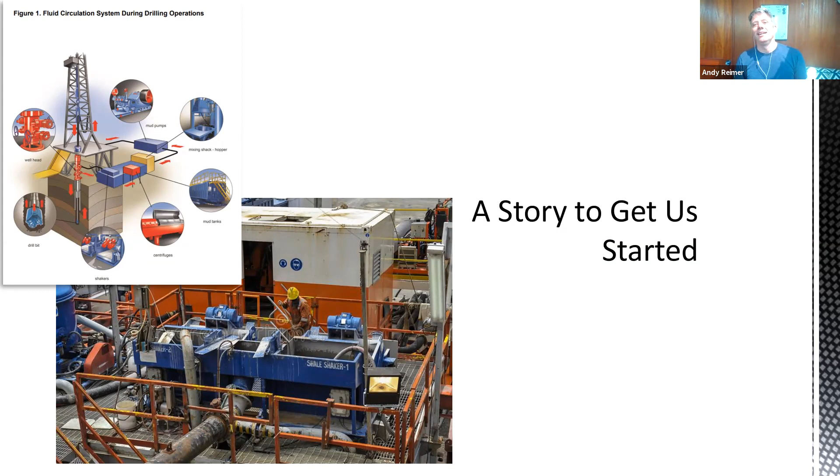It didn't matter what solution you came up with. Robert was capable of poking holes in it and showing why your solution didn't actually solve the problem. And that was a wonderful, wonderful gift, because it taught me that controls are complicated. All right, another story to set the scene.

2019, when we were last allowed out of our homes, I ended up doing this presentation called Engineering Controls, They're Only Human After All. I did it at Petroleum Safety Conference in Banff, and then later on in the fall in Winnipeg at the CSSE Professional Development Conference. And I'm referencing both because you'll know why in a moment in the story.

So the whole premise of this presentation was about engineering controls, and the hierarchy of controls we'll talk about later in the presentation. Engineering controls are supposed to sort of get rid of the human element. In other words, administrative controls, PPE, these other kinds of controls have all these human factors. But an engineering control kind of works automatically.

It's kind of magical. You build it, you set it, you forget it, and it will engage, it will do what it needs to do without human intervention, which of course isn't true. That's part of why they're complicated. We'll talk about that later. But anyway, back to my point on this slide,

I had a little activity on the front end of my presentation. And in both cases, I'm working with safety professionals, so my assumption is that everybody understands engineering controls. So I ran an exercise and said, okay, give me an example of an engineering control. I got everyone broken up. Within your group, think about an engineering control and then talk about all the human factors that could potentially come to bear in that engineering control.

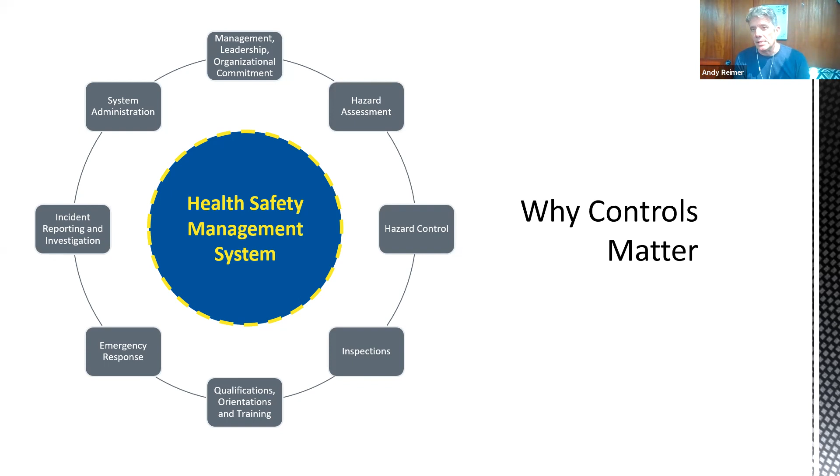But this is an important principle that I came to understand and really embrace during my time at Energy Safety Canada, as we worked through a variety of projects, and it turned out to be true again and again and again.

And that is, we need to rethink our picture. Rather than a management system that has all these equal parts, when you're dealing with safety, at the core of all safety is hazard identification, assessment, and hazard control. All your other elements actually come out of that, support that, drive that, but that's actually the core piece.

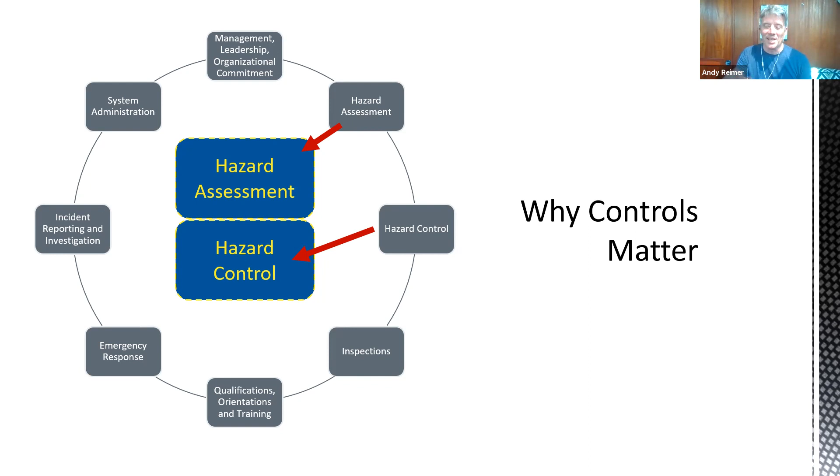With an E, but it should also be the core piece in the other sense. Anyway, I digress. Within that nexus of hazard identification, assessment, and control, the most important piece is control. Why do controls matter? Because there's only one element in your entire health and safety management system that actually prevents your unwanted event, that actually prevents the incident, and that is hazard control. So this has to be at the center of this whole system.

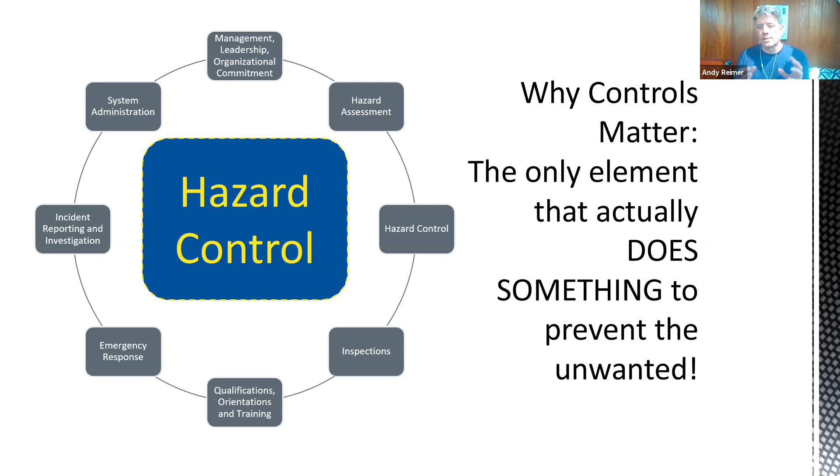All kinds of elements, but at the end of the day, the difference between somebody getting killed, somebody getting injured, a pipeline opening up, a well losing control, the difference is, did the controls work or did they not? This is the stuff that actually prevents it, okay? Just assume we're all agreed on that. So, great. Very simple.

Controls are what matters, but they're complicated. And why are they complicated? Let me count the ways. This is going to be in the category of the "Are we done yet" syndrome. This is for those who've got kids, and who have staff, with attention spans accordingly.

So almost inevitably, when you get to that core piece of hazard identification, assessment, and control, we're going to do it a variety of different ways depending on what kind of safety you're into, the nature of the work of your company, and so on. But you're always going to have this flow: you start with identification, then some kind of assessment, and then finally you do control.

And part of what I've noticed is that we get really fixated with hazard identification. We put a lot of energy into that. I think part of that is because of the incident side. Whenever we have an incident, how often do you put your finger on: they didn't notice that hazard, they didn't spot the hazard. So we keep coming back with, our hazard identification isn't good enough. So we keep pouring this energy into hazard identification.

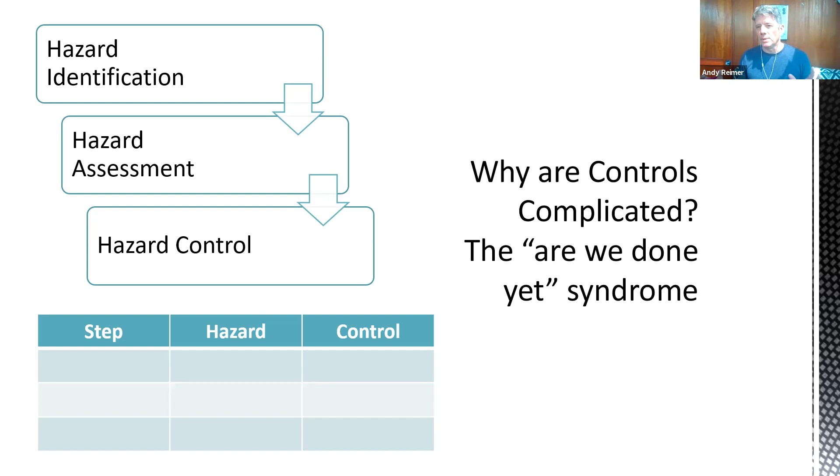When you break the job into steps, I guarantee almost everybody will break the job into steps, argue a bit about where the steps go, and then add the hazards. And what gets done last? Always the controls. By then you are keen to get started on work, to wrap up, or get on to the next one. All the discussion and brainstorming around the hazards has petered out by the time you get to controls.

And then we make it worse. Our formalized one is starting to look increasingly like this: you've got the steps, you've got the hazards, we'll do a risk rating before we apply the controls, then we'll think of the controls, then we'll do a risk rating after the controls. Again, we're introducing more activities. In many ways, this is right. There's nothing wrong with this, but in the end, how much energy is left for really thinking through the controls?

Often, so this is in the bucket of 'Are we done yet?' syndrome. We work on controls when we're all asking the question, 'Are we done yet?'

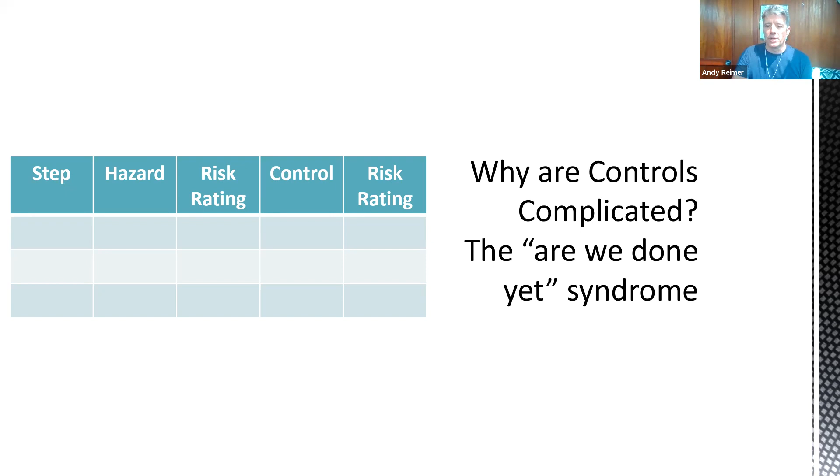All right, the next issue, the hierarchy of controls. Given my last experience with this, allow me for a moment to explain this briefly. Every regulator, every health and safety textbook will tell you that once you've identified your hazards, assessed your hazards, ranked your hazards, whatever language you use, you then start to think about the controls you apply against your hazard.

You thou shalt use the hierarchy of controls as a way of determining your most effective controls, and so you go from top to bottom. Your most effective control, of course, is eliminate the hazard. Best control ever, for sure.

Substitution usually applies in a number of places, typically with a chemical hazard. That's your classic example. You have a really toxic chemical in some kind of process. If we substituted that for something less toxic, we haven't totally eliminated the hazard, but by substitution we've made it not as severe. We've eliminated at least the delta between the two.

Engineering control, the one that nobody seems to get. That's totally unfair. But an engineering control is fundamentally about controlling at source. You're basically ensuring that the hazard exposure never hits the human interface. At its simplest form, a guard over a moving piece of equipment is the simplest form of engineering control.

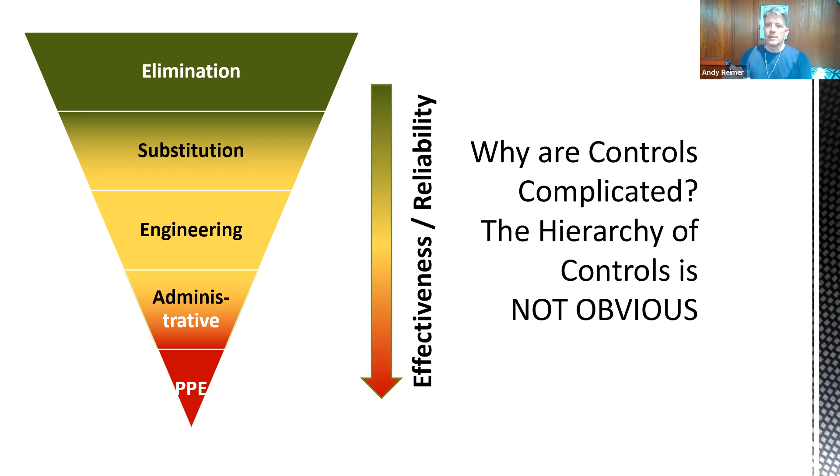So the hierarchy of controls, as per my earlier story, turns out to be deceptively simple. It's actually not as obvious when you start working with it in a practical way. So why are controls complicated? I think the hierarchy of controls hides a secret, one that some of you may know but not everybody fully appreciates: as you move from the bottom to the top, so if it's effective top down, cost, complexity, and unforeseen consequences move upward. And that has a lot of interesting and problematic implications.

We're going to talk about some of those. I think some of those you've probably already appreciated. Some of those are from my earlier story. But this is part of the challenge. The regulator can tell you to go down, but your cost and complexity go the other way.

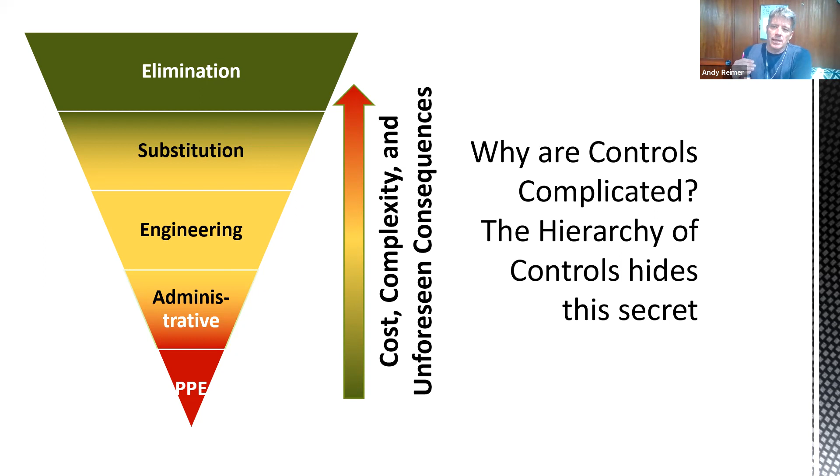All right, let's go to the next slide and look at some of these features. Engineering controls—I have a whole presentation on this, so I don't want to spend a lot of time, but just to remind you: with an engineering control, we believe we're going to remove the human element. It's a set it and forget it, right? Think about a classic example of a mitigative engineering control: an automated sprinkler. The moment there's sufficient heat or another detection trigger, it automatically opens and doses water. It's fantastic—there's no human element.

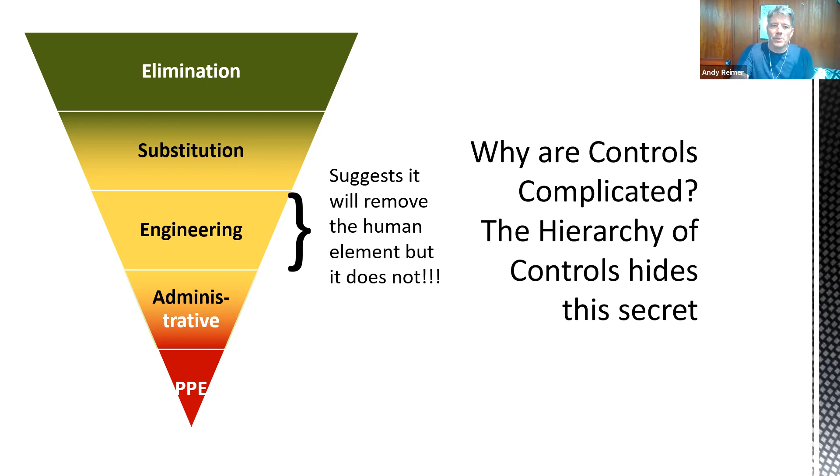Except, of course, there is, right? Why do sprinkler systems fail? Oh, we forgot to do maintenance. Or during installation, everything got piped in, but the last connection to the water source never actually got connected, right? There are all these human factors in the design, building, and maintenance of engineering controls where things go horribly wrong. That's typically how engineering solutions fail.

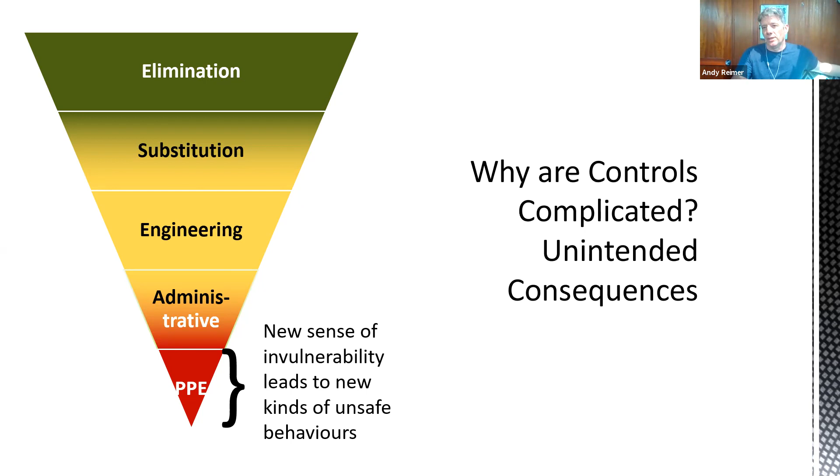PPE—how can PPE go wrong? Unintended consequences. This is a classic example. I won't give you a work example, I'll give you a hockey example. One of the complaints back in the dark ages, when they played hockey without helmets and visors, was that everybody tended to keep their stick below their shoulder. The moment we put on helmets and visors, sticks got up. Why? Because there's a sense of invulnerability. The moment you give people more PPE, they will start to engage in unsafe behaviors because they have a sense of invulnerability that comes from the PPE. I've heard stories of people issuing brand new and improved gloves and having hand injuries go up, right? Because they felt invulnerable. The gloves didn't actually protect them that much more, but they felt that way—completely unintended consequences. I guarantee the history of controls is littered with unintended consequences like that.

What's another example? Where do these go wrong? Unintended consequences—okay, both administrative and PPE controls. Often, remember that cost, complexity, unintended consequences. We kind of deal with that in PPE and administrative controls by having a blanket approach.

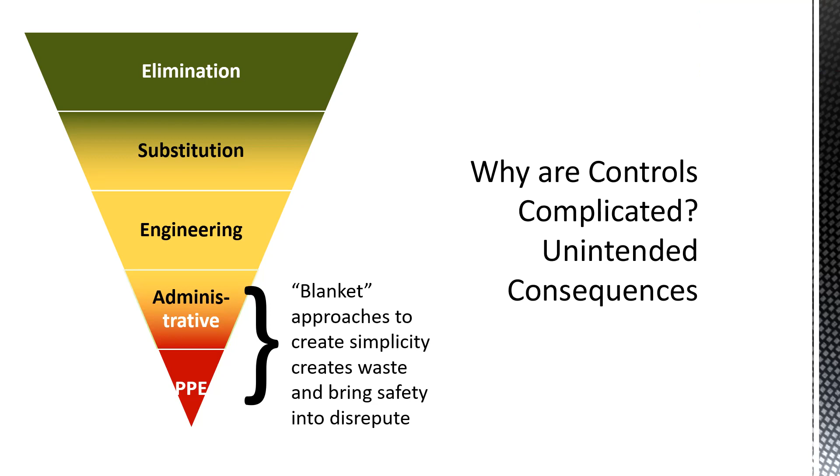This kind of comes out of safety's inherent distrust of the workforce, which permeates certain safety department cultures. We worry about company safety culture, but I think there's a whole industry we could create around safety department culture, because one of the things that occasionally marks it is an inherent suspicion that if you don't really hammer the rules home and go over the top, nobody will listen to you. There's a certain insecurity there. So one of the things we have a habit of doing inside safety departments is create these blanket approaches, because it's so much simpler—we create a hard and fast rule.

So I'm going to give you a classic story. There's a company, which I'll leave nameless, that is very large, and they had a policy on their work sites: thou shalt always wear these really fantastic high-tech heavy-duty leather gloves and hard hats. That was the hard and fast rule. This particular company decided that, as an energy-saving move, their retail outlets would all be converted to LED lighting, so they needed to bring in electrical contractors.

This is one in the category of an overheard conversation that I then went over and had an extended chat about with the person. One of the electrical contractors on the site starts telling his buddy the story of how it went. They're electricians in a retail building, and they've got these heavy gloves and hard hats. On day one and day two of the job, they have to crawl into crawl spaces to get a hold of the wiring. The first thing they realize is you can't actually get in there with a big hard hat, so they take it off, set it to one side, and lean in to do their work. The safety inspector comes by: 'You're not wearing your hard hat, you're home for the day.'

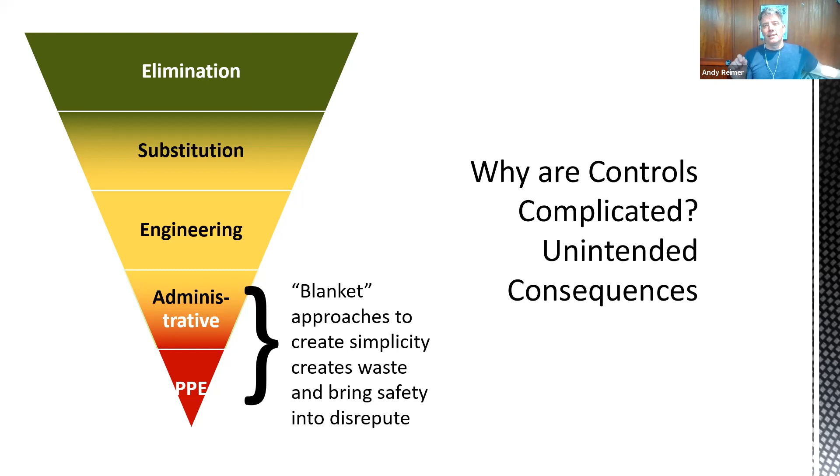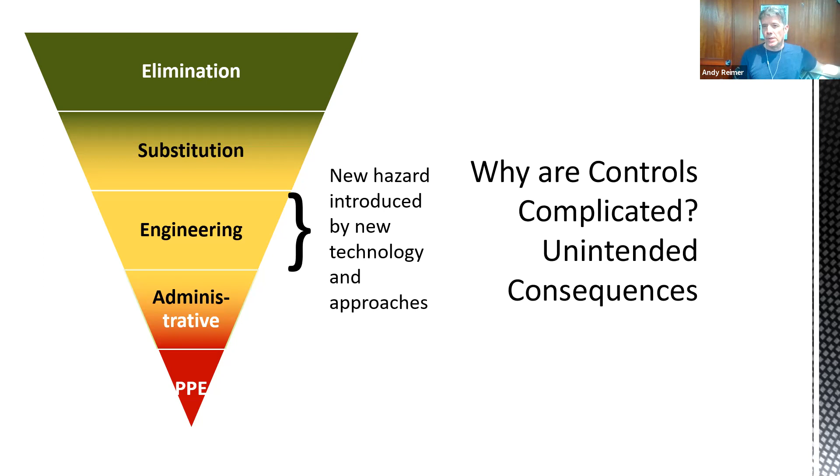All right, enough about that one. Engineering controls. And again, this speaks to the problem earlier, human factor—but not just human factors, technological factors here. That is, we'll come up with a solution for one problem, and we're so fixated on that problem that we fail to appreciate that the new technology, the new approach, has introduced new hazards that we didn't stop to consider. This is the illustration I threw in for my last presentation. To me it's so powerful and effective, so I'm giving it to you because you can steal this one and use it the next time you're talking about engineering controls or why they're tricky.

And that's the Boeing 737. So the whole premise—and you should be familiar with the story from a couple of years back, in 2018, 2019 the story really broke—Boeing had this exceptionally successful 737-800, but they wanted to get into the fuel-efficient commuter plane segment of business. So they took their 737 platform and swapped in this much more fuel-efficient engine for the MAX 8 that you see below. But the net result, as you can imagine, is that airplanes are carefully balanced pieces of equipment. And the new engine sat slightly differently with a slightly different weight, and it threw off the balance of the whole plane. It adjusted the balance of the whole plane.

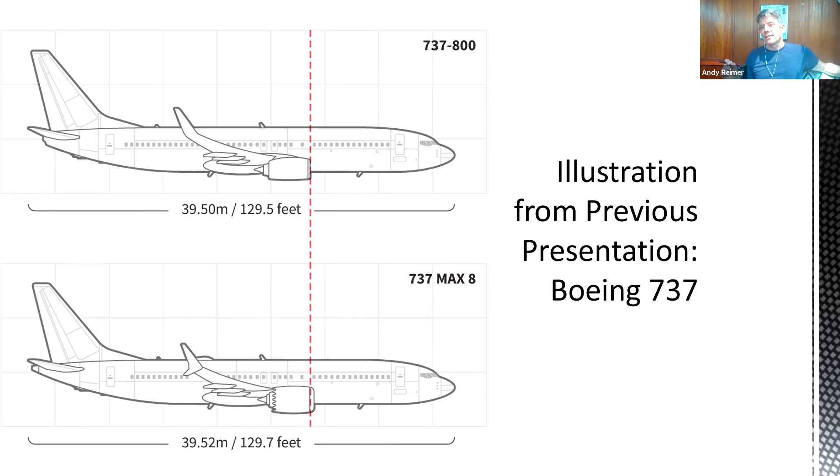So now, a couple of things happen when you throw off the adjustment of a plane's balance. One is it's going to fly differently. So now here's your problem: if it flies differently, is it a different plane? And do you have to retrain all your existing 737 pilots on this new 737? They came up with a very—understand the costs, there's this fine cost margin, the profit margin, in the whole airline manufacturing business—and one of the ways they could sell this, just like the competitors, is they could say, well, you can go straight from the 737-800 to the MAX 8 and not retrain, because we're going to create the Maneuvering Characteristics Augmentation System. What it will do is use a piece of software that will cause this new plane to look and feel and fly exactly like the old plane, and you don't have to retrain.

And this is really clever. One of the pieces of the MCAS system is that it had an angle of attack sensor, which is this feedback loop. So it can tell, is the nose pointed up or down?

Of course, if you follow the story, what actually happened is that angle of attack sensor on the outside of the plane failed, and the pilots had to start fighting. So the pilot adjusts, and the software system says, 'Oh no, you're still pointed too far down,' or the opposite way, 'You're pointed too up, and if you get pointed too far up, you're going to stall. So excuse us, Mr. Pilot, we're just going to take over for a second and bring the nose down.'

So the pilot pulls back up, and the sensor goes, 'No, you're still too steep. We're going to put you down because we don't want you to stall.' This is a fantastic safety feature that prevents people from stalling their airplane. Except, of course, if it's not working and it's sending the wrong signals to the software system.

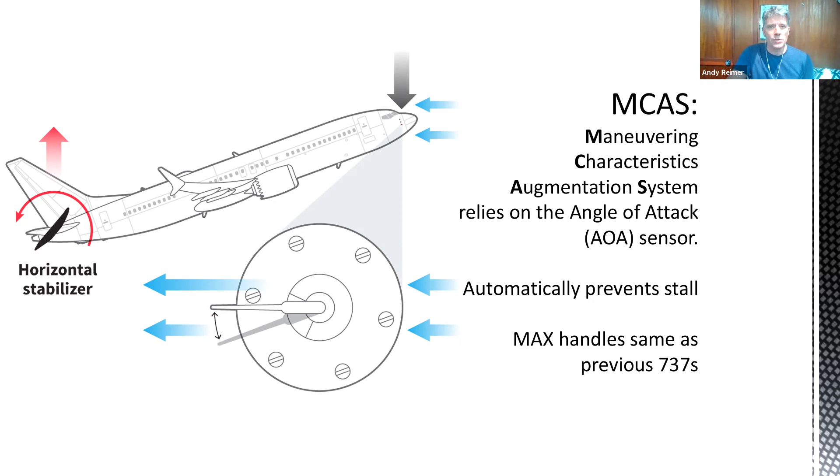In which case, you're headed down, it thinks it's stalling, and it keeps pushing the nose down, and the pilot can't bring it up. Now, had they thought about this eventuality? Yeah, they had, of course they had. They had two little switches there that you could use to turn off the MCAS and get back to fully manual control. And as you can imagine, in that cockpit, with this being a small piece of a booklet training, in that moment with this new and unfamiliar plane, the pilots that crashed their MAX 8s did not put two and two together. They did not flip those switches.

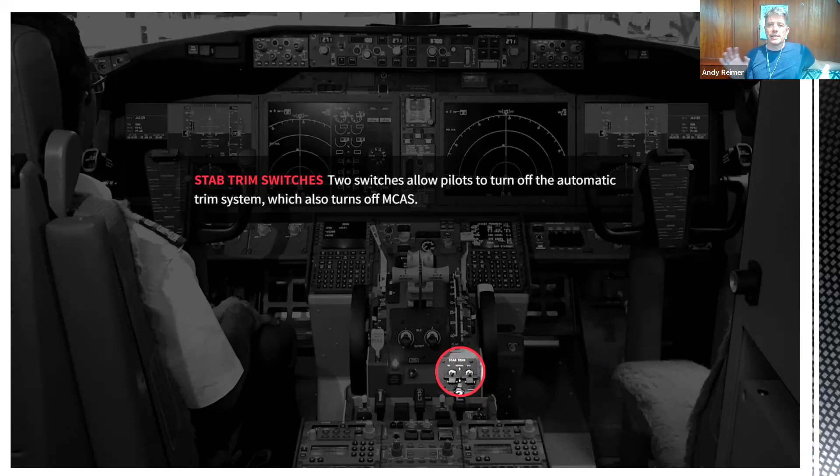So, classic example. This is a safety feature. The MCAS was an engineered control. Automatically prevents stalling, ensures an inexperienced pilot stays safe, the best of intents. Great, but they didn't have Charles Perrow in the room, and they should have, because they added complexity, and the combination of complexity and tight coupling is at the heart of what's called normal accident theory, and it's bad news.

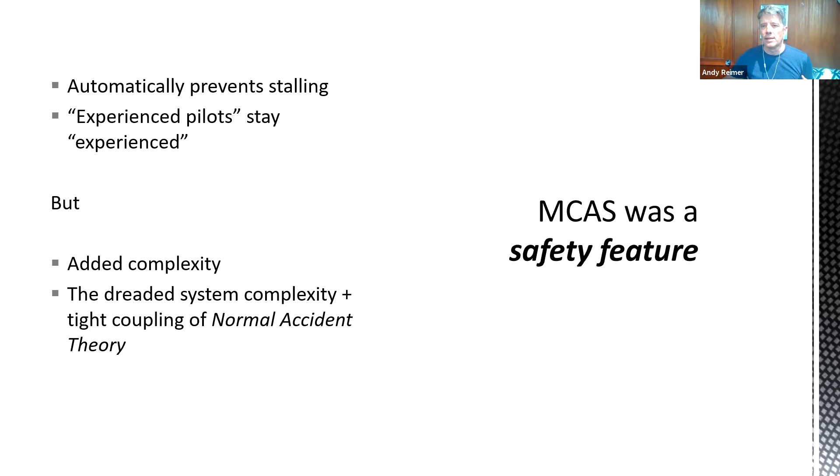I'm not going to spend a lot of time on it, but just to say that wherever you're ending up with this combination of a complex system, where one system bleeds into the next and you can't see which system is doing what at any given point, it'll run tickety-boo. But the moment something goes wrong, your ability to unravel what has gone wrong will not move fast enough for the event unfolding. The event will unfold faster than you can figure it out.

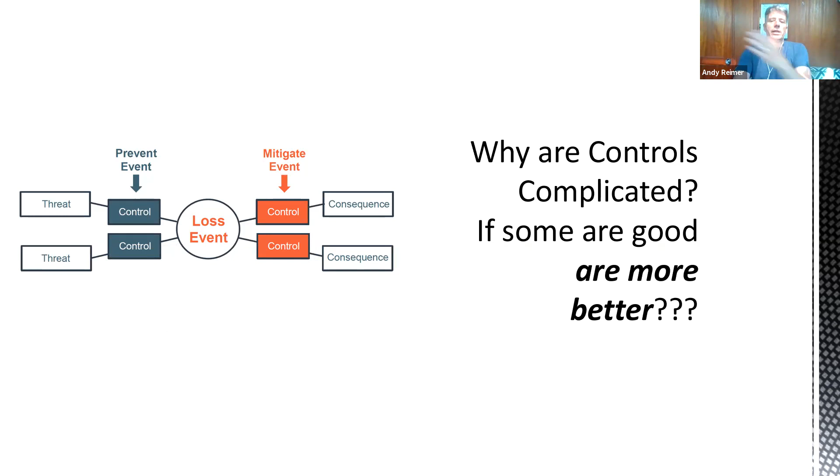Why are controls complicated. Here's another quick feature I'll get to: if some are good, are more better? Here's your classic, you guys know the bow tie. I want to explain, right? Threats, preventive controls that prevent the event, the loss event, the unwanted event, and the far side of it, which is the mitigation controls, so you don't get to the consequences. Okay, you understand bow ties, just assume it, go learn them if you don't. They're wonderful things. Here's the challenge.

One of the challenges is that the more controls you have, the more complex the system is, and the more chances these are tightly coupled, the more chances you have unintended consequences. So more controls means more unintended consequences. More is not better, but we think it is.

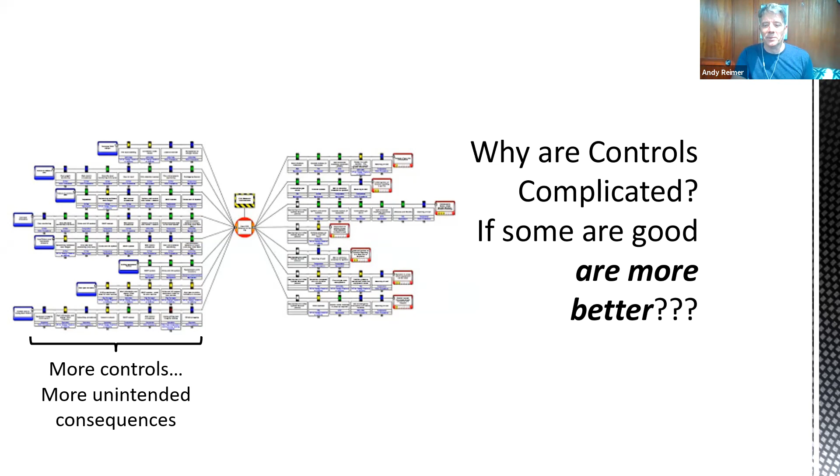And everyone will feel better when you've got 5 controls instead of 1 or 2. All right, so my latest challenge is around why controls are complicated. I'll be brief on this one. So we had a couple incidents.

We had a couple incidents where a helicopter takes off with a load. If you know anything about long line operations with a helicopter, every so often a load won't fly. This is the nature of it, and it will start to swing, and do things that create a hazard for the helicopter. And the pilot has a button they can push, and when they push the button, they drop the load, preventing the helicopter from crashing.

So we had 2 loads jettisoned. And this was an incident that just broke the alarm bell. Oh my God, we have a crisis around long lining here. So some of us were sitting around and form a committee, fly people around, bring in all the contractors, right? The usual response to 'we have a crisis.'

And it was interesting because some of us were sitting around going, I don't know, is that really even an incident? I mean, they dropped the load away from the right of way in a non-populated area. Dropping a load is technically a mitigative control to prevent the consequence of the helicopter crashing.

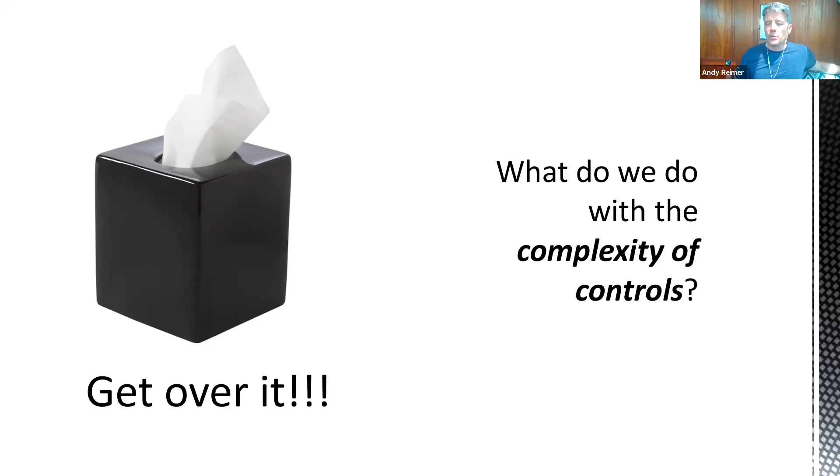They're the elephant in the room, but we have to get over it, because remember, what's at the core? What's at the core of our safety systems is hazard controls. If we don't solve this problem, we've solved the rest of it—it's just lipstick on a pig.

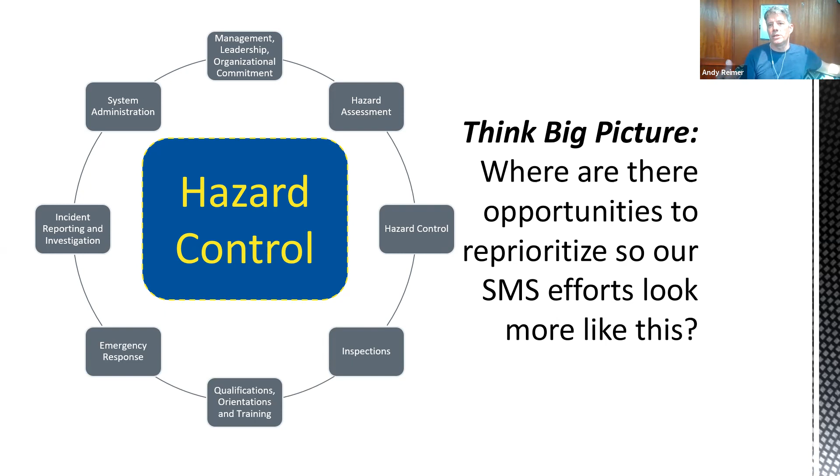It's not helping. So I think my challenge to you today is to think big picture. Where are there opportunities to reprioritize so our safety management system efforts look more like this? I'm just planting the seed. I'm going to throw some suggestions at the end, but I want you to think seriously about what if we start seeing hazard control as the most important thing we do, at the center of what we do, and everything else just supports that.

A couple of suggestions on some of the specifics. Are we done yet? How do we overcome that? There are some simple ways we can do that. One simple suggestion: if you're ever going through whatever simple or complex version of hazard identification, assessment, and control—obviously if this is the moment before you're doing the job, I've got suggestions there—but let's say you're sitting down and you're going to take some time with one of these, or do another one of these.

Break it up, right? Do your hazard identification, hazard assessment, take a long break, do it the next day. Whatever it takes, when you sit down to do hazard control, make it feel like you're starting with something. Come in with fresh energy, fresh eyes, not bedraggled, tired of the process. This stuff deserves fresh energy, fresh eyes. Figure out how to do that with your processes. I think that'll make all the difference in the world.

And then this is my other suggestion: cost, complexity, and unforeseen consequences coming out of your controls. So you've got two options here. Either hire or nurture a whip-smart contrarian to play the devil's advocate for your control discussions. If you need to name somebody to do this job, do it. I mean, devil's advocate is a classic safety culture move. Bake it into your control discussions.

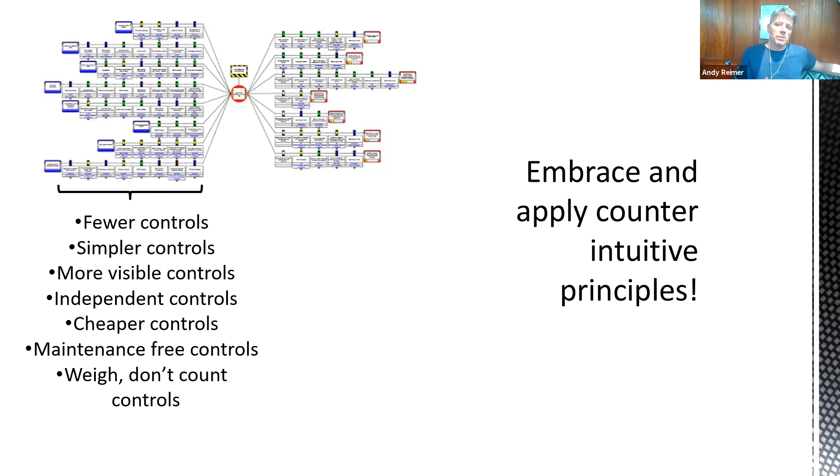When you create a diagram like this, don't count the controls, weigh them. How effective are they? How fail-safe are they? One that's really effective, fail-safe, everybody knows about, everybody can see, everybody monitors, is far more valuable than 10 that only one person knows about, or that are high maintenance, or really expensive and won't get implemented till two years from now. Go back to these principles. These are not the principles you will normally think about doing controls. You need to.

The other thing: stop managing incidents, start managing controls. You know that example I gave you with the helicopter and the crane? Forget about whether it is an incident or not an incident. In that instance, you have a control that failed and a control that worked. Both of those are really interesting. And you're in the business of managing controls, not incidents.

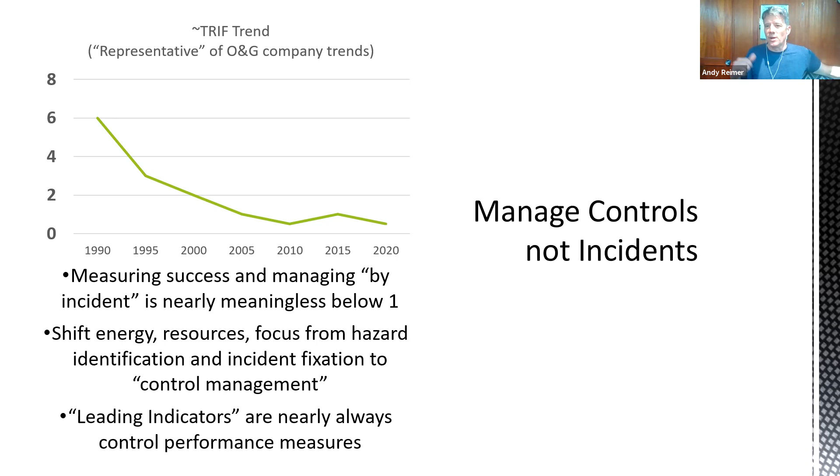Why? Because right now, our incident rates are so low in the industry, it's bouncing along, it's static. And leadership will keep worrying if you're at 0.5 or 0.75 or at 1 and 1.25. Listen, within the safety department, we know that's mostly static noise, and rarely do you get intelligence out of that. The intelligence you need is, are my controls working or are they not? And you know what control performance measures are? They're leading indicators. It's one and the same bucket. You keep talking about leading indicators. All that is, is measuring that the controls you've got out there are working.

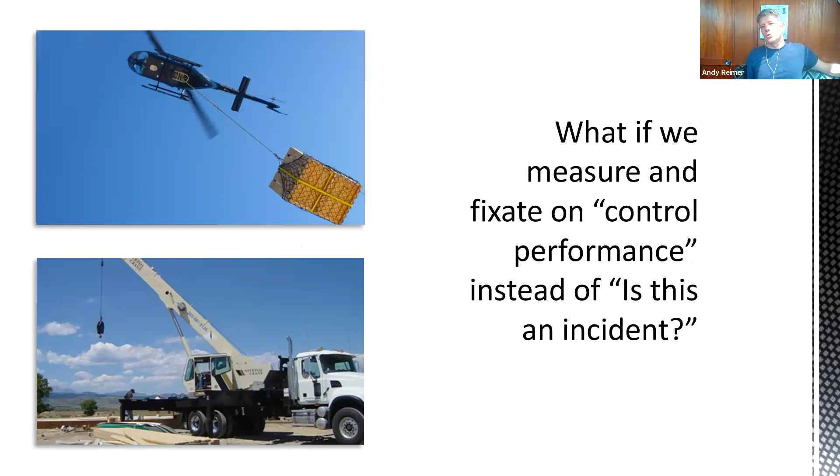That's leading indicators. So that's where you want to go. That's one way that you throw safety controls at the center of your system. And I think one of the things you want to think about and consider, especially if you've got major accident risk with your work, is consider, or at least take a look at, critical control management as something you can embrace within your company, or some variation on it.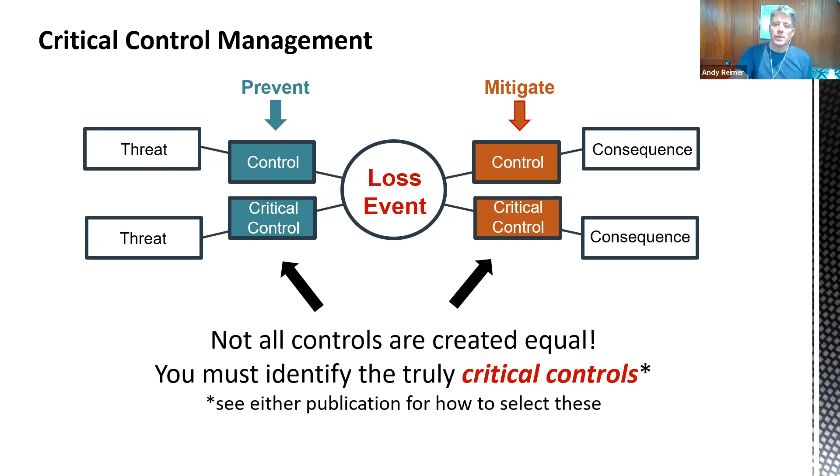And then when we've got our critical controls, we are going to monitor the heck out of these, right? We're going to make sure our controls are working. They're not producing unintended consequences, that when we expect them to perform, they will actually perform. And again, try to drive simplicity into the control. Try to drive really straightforward visibility, simplicity into your oversight, insight into your controls.

I think there's no way to get over the complexity of controls than to just start to wrestle them and wrestle them into submission. And that's my challenge for you guys today.